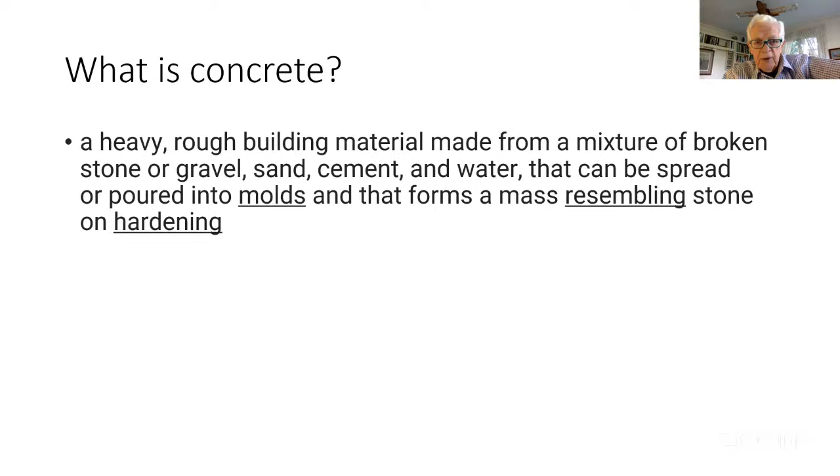Okay, I'll think about that. I'm not sure that I can comment on it right now. But you're right. At least so far, we've certainly tried to address the electricity sector, the transportation sector. Actually, we're doing something now about commercial and residential. We talked about heat pumps a few minutes ago. Industry has actually attacked this as well.

We're going to talk about the production of lime here in a minute, but it turns out that smelting of steel suffers from very similar issues, and it's being addressed as well. I know that hydrogen is one of the components of solving that issue within the steel industry, as well as recycling steel and aluminum.

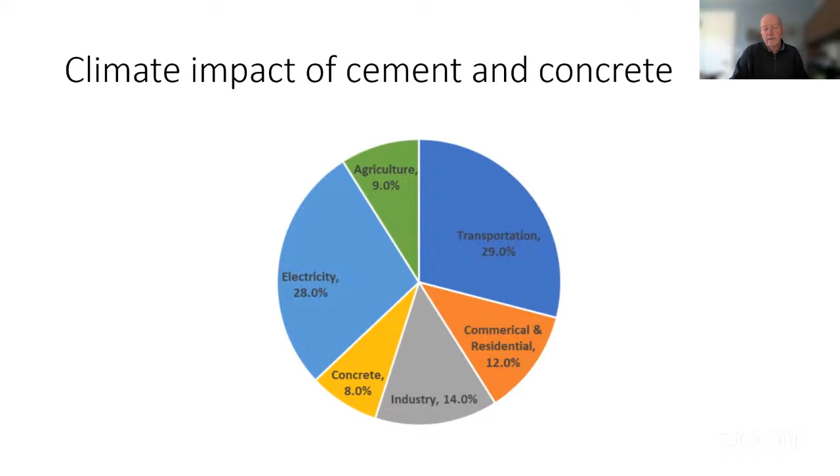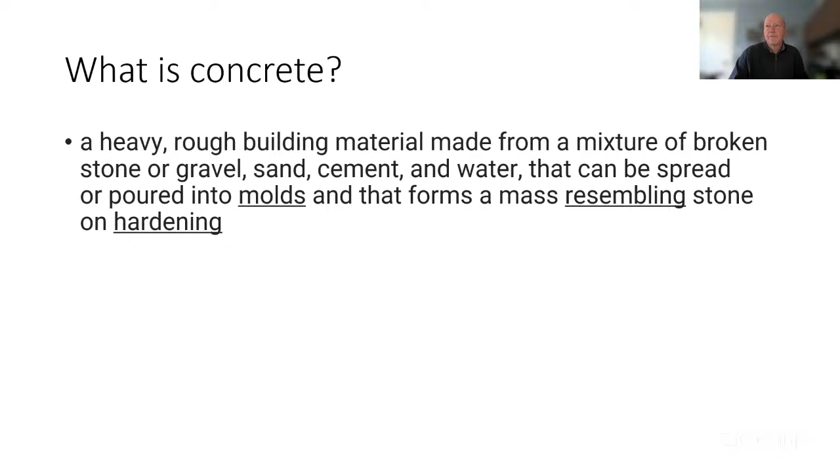So first of all, what is concrete? I think most people, if not everybody, are familiar with it. It's a mixture of broken stone or gravel with sand, cement, which is largely responsible for the carbon dioxide emissions, and then water. It can be spread or poured into molds and forms a mass resembling stone on hardening. It's very convenient because it can be formed into all kinds of shapes for support. And I think everybody, after thinking about it, realizes that's probably why it's used so much.

And cement itself is the binder. So in concrete, we see various sizes of aggregate. It could be larger stones, or it could be small pebbles, depending on what you're using the concrete for. And that cement actually surrounds the aggregate and then sets up and hardens, and it adheres to the other materials to bind them together. So it's a binding agent, the cement in it.

So I'm going to get into the chemistry, because it actually highlights some of the solutions. And I find it interesting, in particular now that I understand it better than I used to. It actually looks really complicated, but it's not necessarily as complicated as you would think. So you start out with this calcium carbonate, which is limestone. I think we've all heard of limestone. I never knew that it was actually calcium carbonate until I got involved in this.

And what you do with it is you put it into a kiln at very high temperature, and that process drives off carbon dioxide, CO2, and leaves you with lime, calcium oxide. Okay, so this is a process that, first of all, you can see right there, drives off a whole bunch of carbon dioxide, and in doing that, we're creating a climate issue. In addition to that, you have to raise this to somewhere in the neighborhood of 1,500 degrees Fahrenheit to accomplish this reaction. So it takes a lot of energy to get up to that temperature.

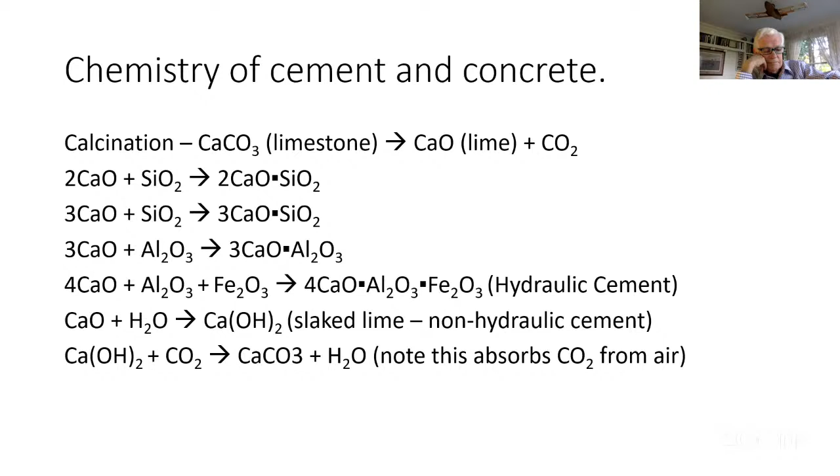And so in clays, you find this silica and alumina and iron. And you mix all this together in this kiln, and the CO2 is driven off, and you end up with what's called clinker. The clinker comes out of the kiln in chunks, and then it's ground into a fine powder. And that's what you can buy in bags of Portland cement. And many of you, if not everybody, has used Portland cement at one point in your life, or seen it at least.

The calcium oxide then can be mixed with water. And when you do that, you end up with calcium hydroxide. It's called slaked lime. I'm not sure why it's called slaked lime; I haven't looked that up yet. But if you take a look at the last line of this, if you add CO2 to calcium hydroxide, you end up getting calcium carbonate back with water. That's interesting because you're going to see in this chemistry that that's one of the ways of resolving one of these problems.

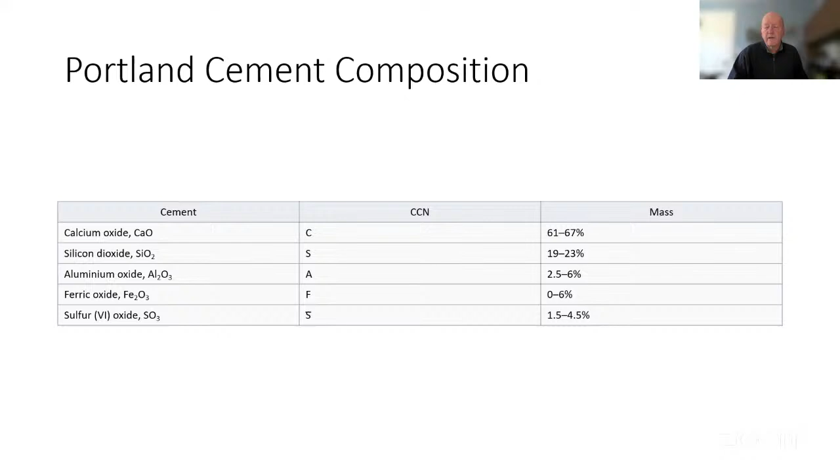Okay, so here's a typical composition. 60% range for calcium oxide or lime. About 20% silicon dioxide, 2.5 to 6% of aluminum oxide. Remember, it accelerates hardening, gives you a little bit of early strength. Likewise, 0 to 6% of ferric oxide, and then you have a little bit of this sulfur in there. Okay, and the sulfur will slow things down. It's used to moderate how quickly hardening occurs.

Okay, and this is a description of actually what happens when you add water to this cement. Here's kind of what happens in sequence. So the first thing that happens is this tricalcium aluminate and gypsum and water react together, and it forms these crystals that are only stable in a solution with gypsum, and it does not contribute any strength to the cement. Okay, but what it does do, you can see the amount of heat that it releases. So it releases a fair amount of heat or energy per gram of reactants.

The next thing that happens is you get this tricalcium silicate. It gets hydrated. Okay, and notice in here that when you hydrate this tricalcium silicate, remember the notation here where the C reflects calcium, S is silica, H is water. Okay, so you're hydrating this stuff, and you end up generating calcium hydroxide. So in the Portland cement, when you put water in there, you're going to be forming calcium hydroxide simply by the mixing of calcium oxide with water. But in addition to that, this tricalcium silicate is also going to generate even more calcium hydroxide.

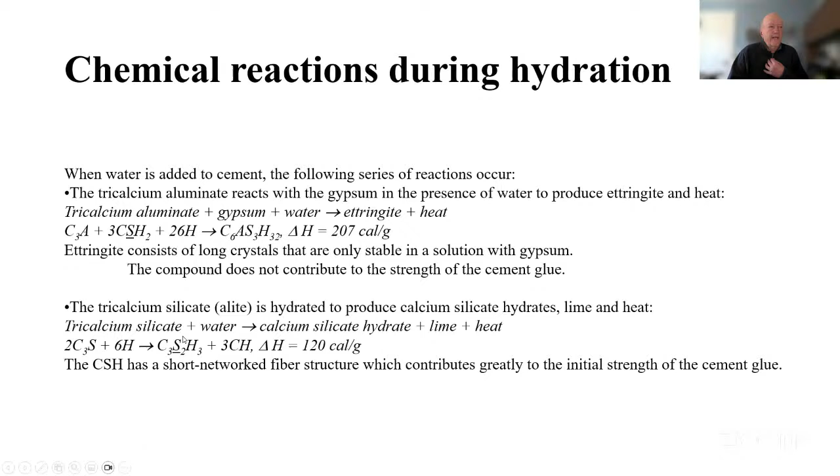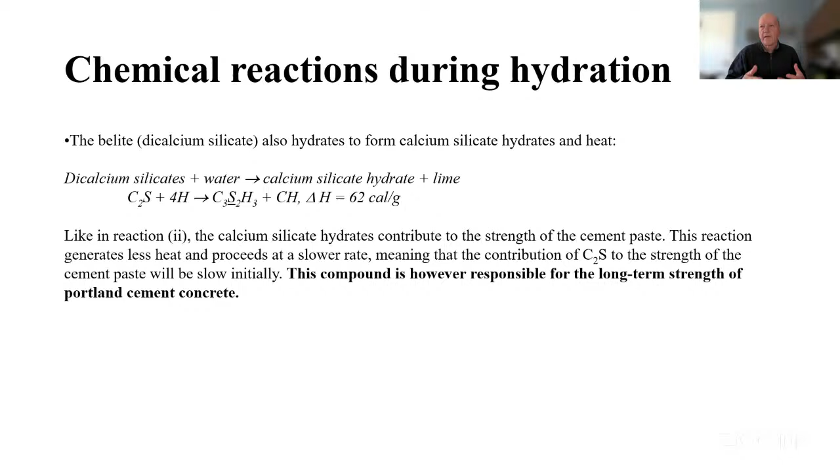Okay, and this is the reaction that ultimately causes concrete to become stronger and stronger as time goes on. So you'll see that the compressive strength of concrete will get quite high over a period of a month. And that's why when you look at these buildings that are being built right now, you'll see a lot of supporting structure in place literally for a month to allow that concrete to gain the strength that it was originally designed to have. Okay.

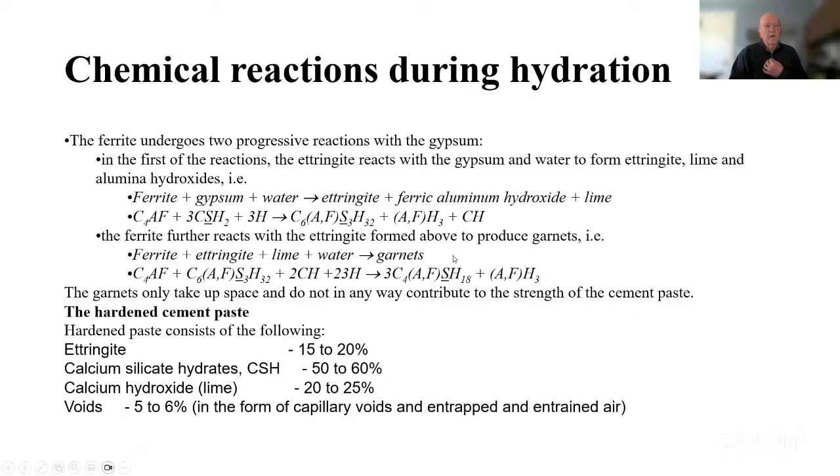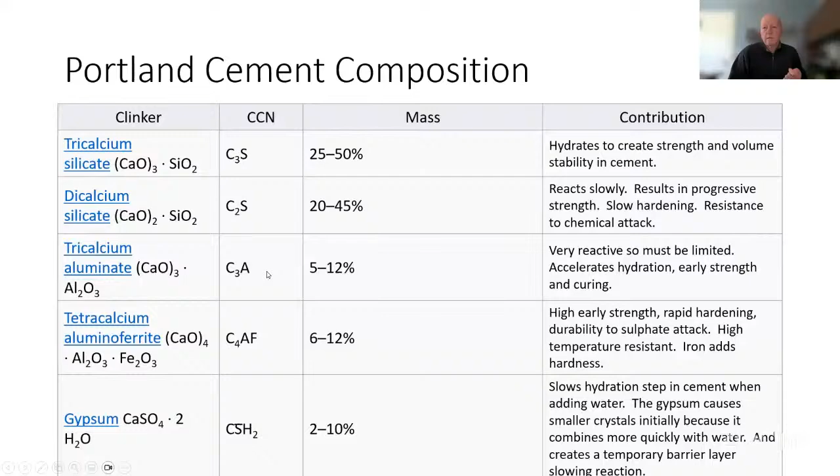Okay, so one of the important elements of this is that this alkali and base, calcium hydroxide, is considered to be caustic. It's considered to be an alkali. It's actually what activates Portland cement to harden. It actually catalyzes that reaction and is involved in that reaction. And so to the extent that you can find other materials that have these same minerals in them, then you can substitute these other materials for the clay or the clinker that is used in Portland cement. Okay, and so that's one of the strategies that we're going to talk about here.

Let's see if I can get past this again.

Okay, so I know that many of the alternative solutions point at using this particular strategy, activating them using an alkali, and so we're going to talk about that.

But then some of these materials are also subject to sulfur attacks. So imagine now you use some material that has a lot of alumina in it. Well, that actually exposes that material to a sulfur attack that will result in cracking. So in addition to substituting alternative raw materials, there are often ways of including other additives to avoid these other reactions. Okay.

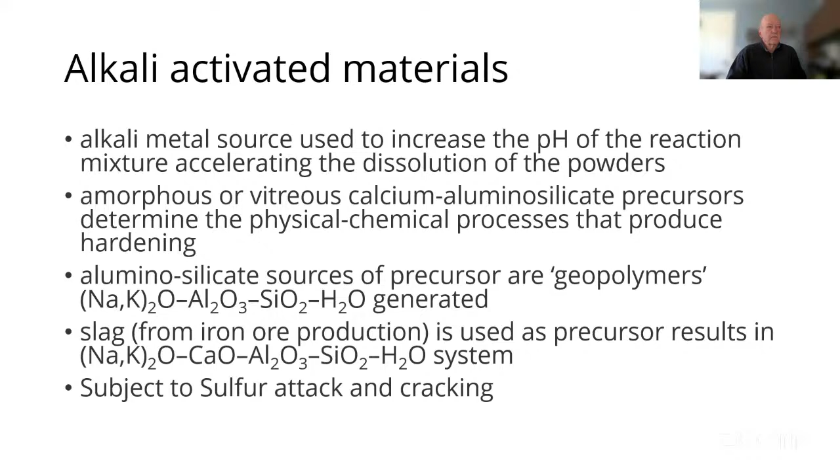Okay, so we were actually just riding our bikes through the Netherlands, and I can tell you that they're always dredging the canals there. So I would imagine that a lot of this stuff comes from something like that.

But in addition to that, another source of effectively a geopolymer is fly ash. And fly ash likewise contains all of these minerals. And it turns out that this is something that's been known for years and years. Fly ash is actually a very common component of concrete today, and has been for years, mainly because it's abundant and it's cheap. Electric utilities have had to do something with it for years, and one of the things that they can do with it is include it in concrete.

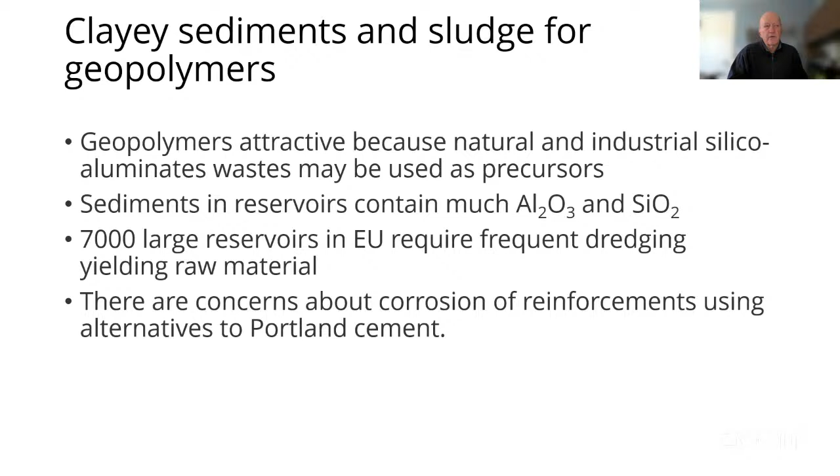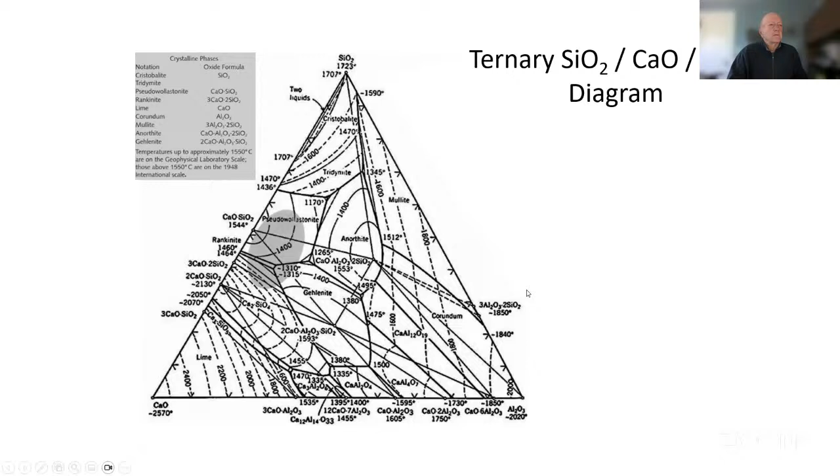So with that as a backdrop, as I said, I wanted to go through this chemistry to start with. I wanted to switch to, you know, what are we going to do about this? And so I have to tell you that, as I said, I got really interested in this, and then I started really talking with a professor at the University of Wisconsin. And I told him that I really didn't know that I could help him, and he didn't need any help technically, but that I could possibly help with policy. And policy then would drive the interest in these alternative materials, one of which he and his colleague are getting in business to produce.

So I started, you know, talking to various people inside and outside of Citizens Climate Lobby, and I ran into a woman who, from the outside, you would never guess in a million years that she's accomplished what she has. She is a Girl Scout troop leader. But in addition to that, she's actually very well-trained, arguably a business person. She happens to be mom to four little girls, I think, who range in age from, at the time, probably 6 to 14. And now they're a few years older. But they were all in the Girl Scouts.

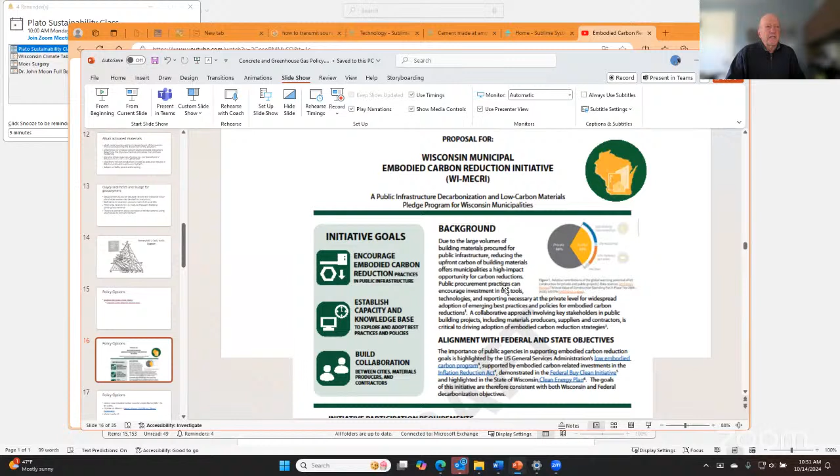Okay, so she's actually described a whole bunch of different elements of this initiative, and we've actually taken this initiative to a couple of towns, and I'm going to talk about that here in a minute. But we've taken this to a couple of towns around Madison, and we'll soon do it in Madison as well. Okay, so that's one of the things that's being done, and it all has to do with lowering embodied carbon in products.

But it turns out that we're talking about concrete here, and so another thing that's going on right now is what I'll describe as LECLA laws. LECLA is an acronym which stands for Low Embodied Carbon Concrete Leadership Act. The first one of these was introduced in New Jersey, and it was actually passed. It was a bipartisan bill. What it does is to provide for money to get behind, I'll say, small startups who are looking into producing alternatives to Portland cement.

And so there's a certain amount of money that's available really for any project to use to offset the added cost of a technology that will avoid some of the carbon dioxide that's emitted in producing some of the materials that are being used on the project, and in this case, related to concrete. So there are several of these. The first one, as I mentioned, was in New Jersey. It was passed. There's another in New York, and there are several others that are being pursued around the country.

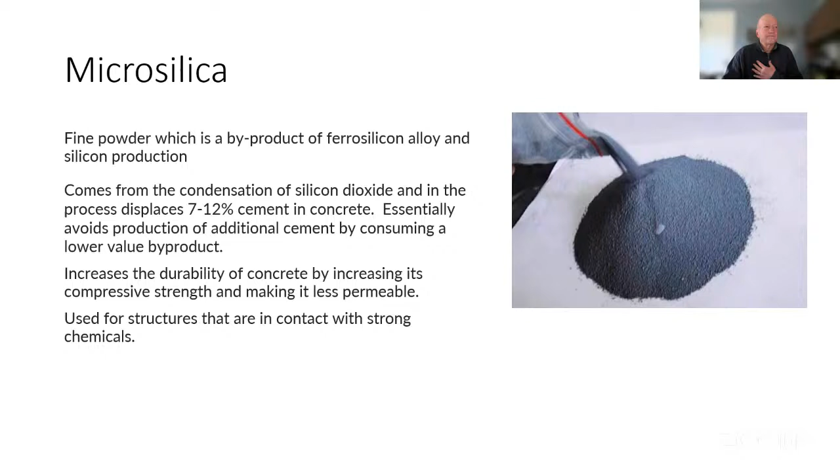And a lot of this stuff will end up in subsequent concrete because it has all of those minerals that we were looking at earlier that form concrete. Now, most of this will actually be used as the aggregate, but if you grind this stuff up, it's got all those minerals in it that we need to make cement.

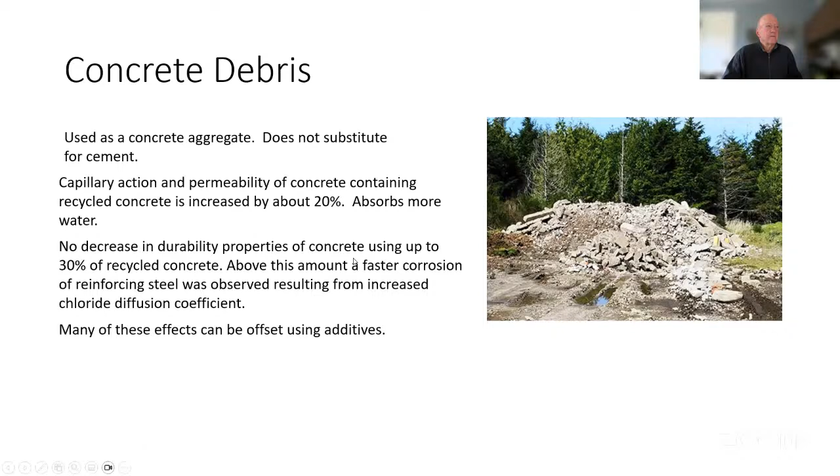Post-consumer glass, okay, is another thing that's used. Again, glass is quartz. It's a bunch of silica, so it's got the right minerals in it to make cement. And in fact, in some cases, they leave the air in these things. It just takes up space, and in some structures, that air that's left in the form ultimately improves the performance of what you're building by insulating.

This is something that I presented the last time I hit this subject. It's really what got me involved in learning more about this to begin with. And this is something that professors at the University of Wisconsin are working on right now. Essentially, what they're doing is they're taking

fly ash, and the composition of fly ash is calcium, silica, alumina, and iron. Those are all elements that you find in Portland cement, just not necessarily in the right proportions, but there's a lot of calcium and certainly a lot of silica that was in the original coal that was burned in power plants.

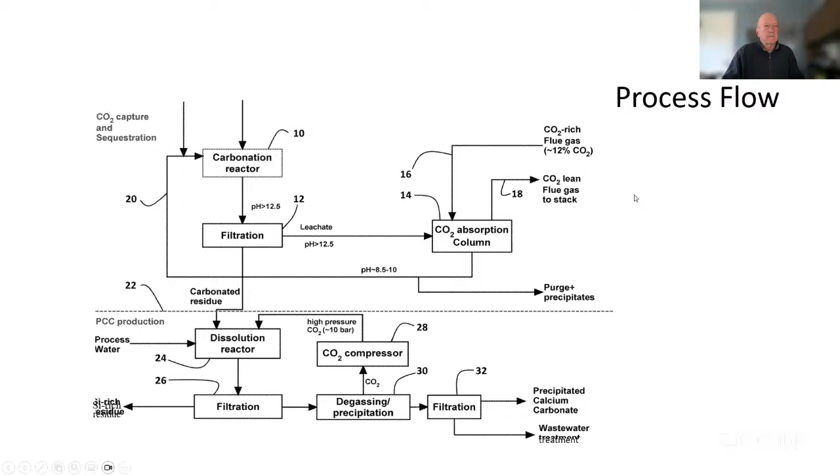So they patented this. This is the diagram that came from their patent literature. It talks about what they're doing, but ultimately what they do depends on how the process develops. But I know that right now they are getting ready to produce trial quantities of this, either here in Madison or perhaps down in Middleton. And as I said, I think they have a site picked out for where they would set up a pilot facility right now. Kind of interesting. So there actually are a number of other companies that are pursuing this right now.

I mentioned that the old concrete can be used for this. This is an article that talks about what people are doing to recycle old concrete. Effectively, they are taking old concrete and grinding it up, and that exposes all of that silica and calcium and alumina sitting in the old concrete, and makes it available for producing cement again.

There's a company called Sublime, kind of a clever name. This is a reference to their website, and they're kind of interesting to me because what they claim they can do is produce calcium oxide electrolytically. They will potentially take something other than calcium carbonate and put it into an electrolytic cell and drive off the anion from the calcium and form calcium oxide

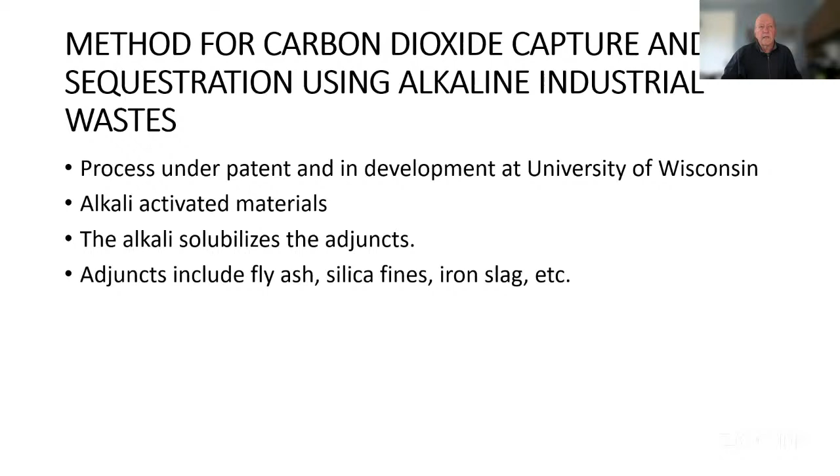Whereas this process up here, the objective is actually to capture enough CO2 from the air to offset anything that you've included already. As I said, there's a lot of calcium hydroxide that's left over in the cement when you're done hydrating it. And in fact, concrete itself will absorb CO2 over its lifetime, and that's the reason why that reaction is taking place.

So as a summary, this was a summary of the different strategies that are being taken by different companies to address the CO2 issue. So in some cases, these guys are going after point source CO2 injected into concrete. So, for example, if you're at a

utility that is burning gas or coal, then what's going up the stack is a fairly concentrated stream of CO2 and water, and you can use that concentrated stream to interact with, say, concrete, and you can absorb a lot of that CO2 and convert it into calcium carbonate. And so there are companies that are, well, this is a list of them right here.

Solidia, Carbon Built, Carbicrete, Carbon Cure. Carbon Cure is an outfit that I'm more familiar with. They do this ready mix concrete, which is, boy, a lot of concrete is distributed that way, right? So that's really where you want to provide your product.

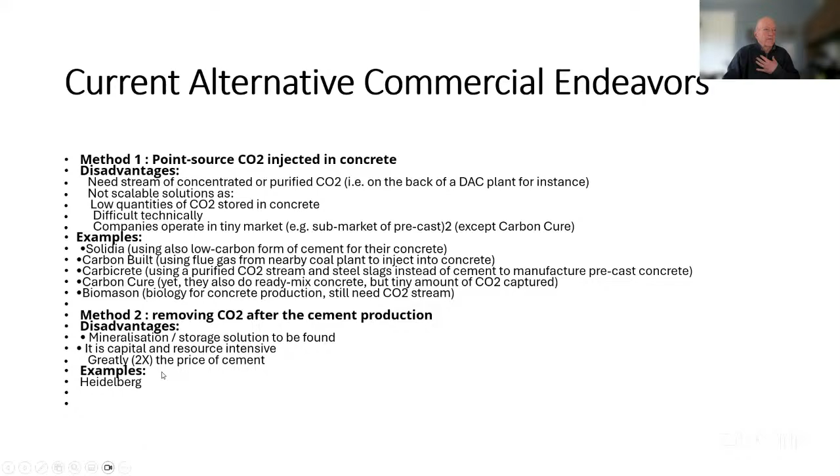Another alternative is removing the CO2 after the cement production. So you know you're driving CO2 off when you're producing Portland cement, so you can capture it right there and mineralize it. And so there's a company called Heidelberg that's doing that. Then there are people who are going after different manufacturing processes.

So I mentioned Sublime. They use renewable energy, and they use something less carbon intensive for cement. So, I told you that they're using an electrolytic cell to do this, and they are also tying that into renewable energy. In fact, I think they're locating their facilities right next to a lot of solar power.

Here, this Brimstone company is using calcium silicate rock as opposed to calcium carbonate, so that when you do the separation, you don't get CO2 emitted. So there are different descriptions of these different companies and what they're trying to accomplish. But in any case, they're all trying to produce a material using a different manufacturing process to avoid that CO2.

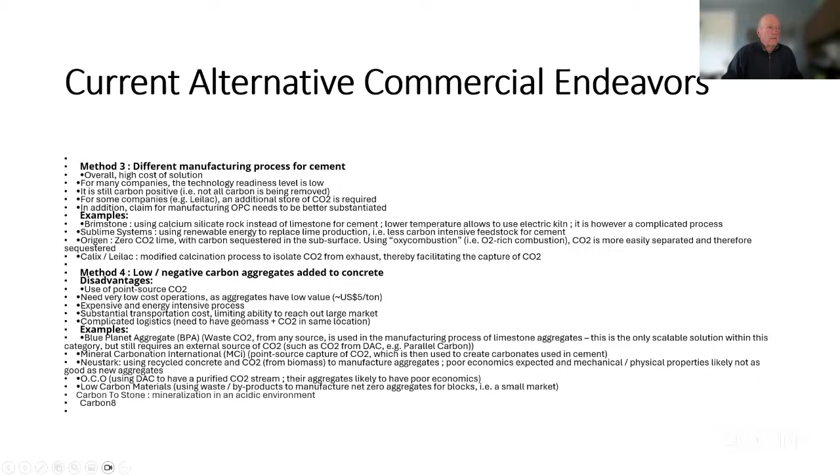And then finally, SCM stands for supplementary cementitious materials to reduce cement content. And actually, this is sort of what they're pursuing at UW. So they're doing this with other substrates, let's call them, like fly ash. But you can use really anything that includes those minerals that we talked about in the original chemistry slides.

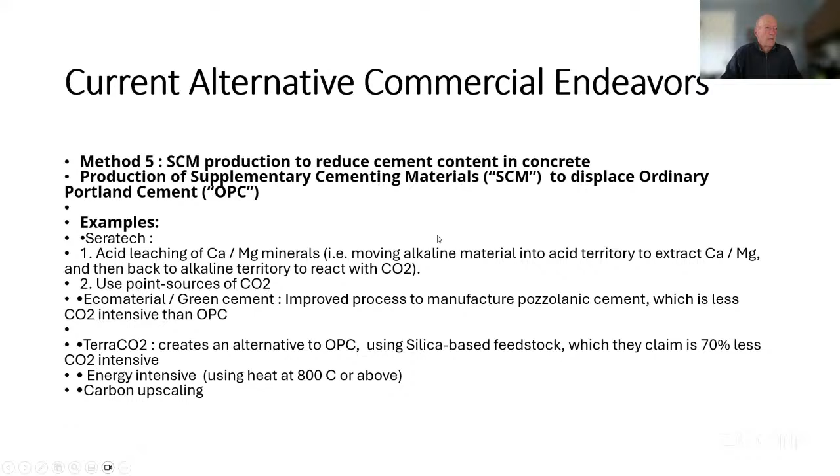Where's the real progress? So it turns out that in Portland, and this was something that I got really excited about, I could show you this video, but I'm not going to take up the time right now. In Portland, they decided to conduct an experiment. In particular, they were interested if reducing the amount of Portland cement in their sidewalk mixture would have any impact on the performance of the sidewalks that they poured, and also whether it would make a difference to the construction workers, the guys who are forming and pouring the sidewalks.

And so they actually conducted an experiment in the city where they took on the liability risk. I think they poured, oh boy, I'm going to say 5 different blends or something like that. And included among them was one of these very low embodied carbon admixtures to lower the carbon footprint of the concrete. And they found that they were successful in all 5 cases. They ended up with properties that met requirements, if not more so.

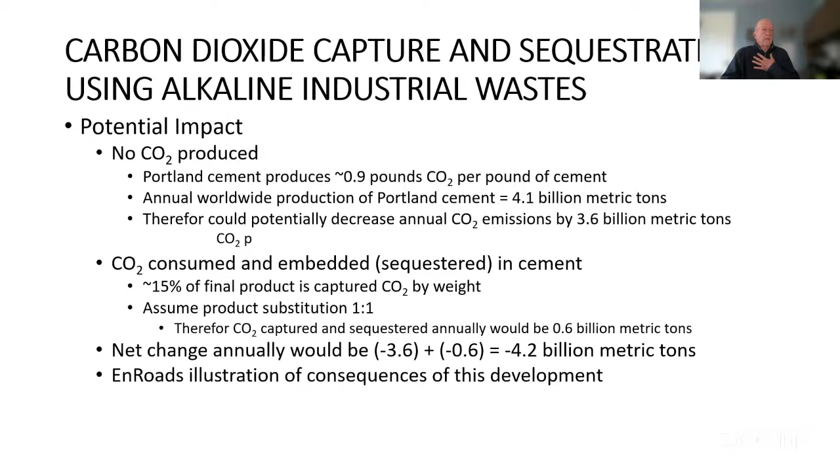And when I ran this into En-ROADS, which is a simulation that allows you to sort of play around with the effect of changing various policies and the effect on the climate and the warming potential of those different changes, En-ROADS implied that I could lower the ultimate temperature rise to, I think it was like 1.8 degrees centigrade, something like that.

Then there's this issue of cost, and I've mentioned this before, at least I believe that being able to match Portland cement cost is very important. And I think that can be accomplished, in particular using fly ash, because fly ash that's just sitting around really might be available for as little as $0 per ton. In fact, it's possible that some utilities, because they have to remediate, might even pay you to take it away. I don't know that, but it's possible.

There's also an Inflation Reduction Act subsidy, which is at about $30 a ton. I mentioned LECCLA. Remember the policy that's out there around LECCLA. There's money available there. So I believe that the net cost of this alternative could be extremely low, and it ultimately might even compete with asphalt, because asphalt is clearly used much more extensively than concrete nowadays, in part because it's much cheaper, and there's a lot of opportunity to use concrete as an alternative to asphalt, and concrete will sequester carbon dioxide.

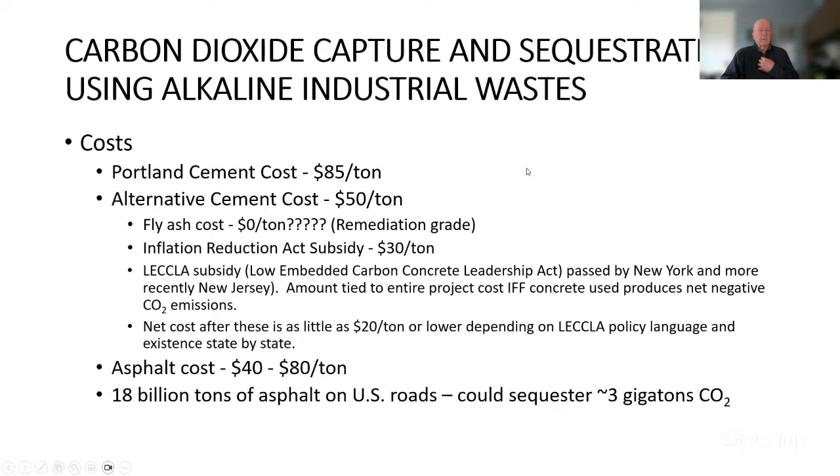Okay, so that's kind of the end of what I have right now. I just saw a hand rise, and so I would imagine that any of you guys can speak up whenever you want to.

Doug? Yeah. One of the things, and I think I probably learned this as a consequence of one of your earlier talks on cement, I thought that they were still finding out and not completely understanding, for instance, how Roman concrete has lasted so long, and that because we don't fully understand all the processes that cause really long-lived concrete, there's an increasing reluctance to tamper at all with the recipe.

And I wonder, I could see the sidewalks, and even in Wisconsin, I would be reluctant for them to take Portland, Oregon results and apply them to our sidewalks without further testing, just because of the change in environment, the amount of rain we get. Maybe we'll get more rain and we'll get more crevices with the freezing and thawing. I just see this as a big potential for solving environmental problems, but it's also a big problem for instability in structures that might be built.